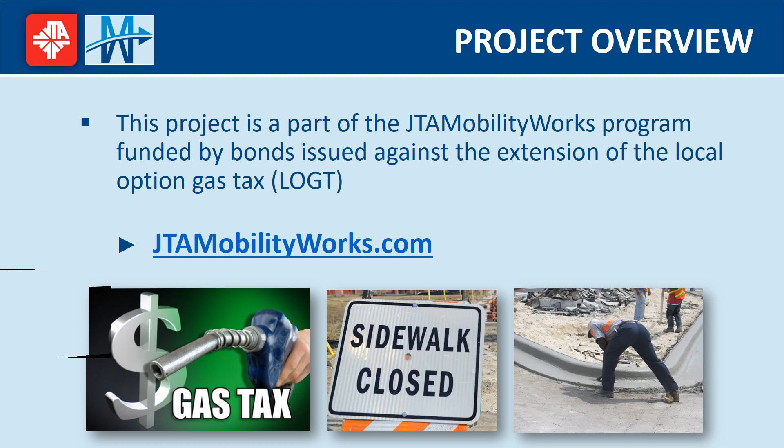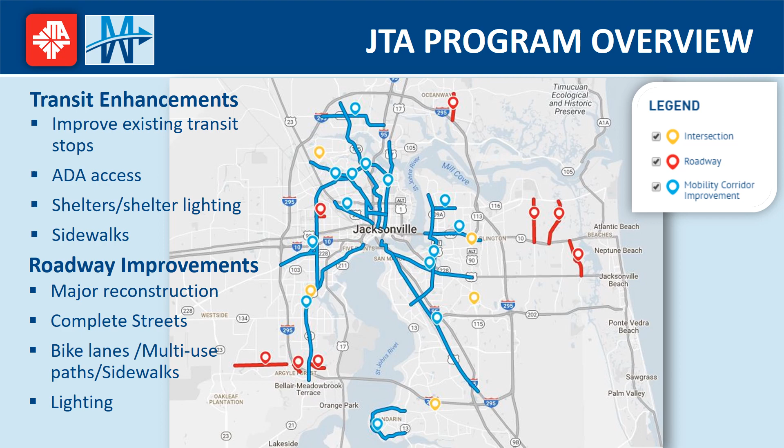As you can see by this map, through its MobilityWorks program, JTA has roadway, mobility corridor improvements, and complete streets projects in nearly every sector of Jacksonville.

Major objectives of the project are to reduce vehicular and pedestrian accidents and delays, provide operational improvements for better vehicular, bicycle, and pedestrian traffic, improve drainage, and provide acceptable traffic service levels through the year 2030. The roadway currently experiences traffic demand that may result in an unacceptable traffic service level within the next 10 years if improvements are not made to the corridor. By providing the proposed improvements, traffic service levels can be preserved and enhanced through 2030 and beyond.

The benefits of these improvements also include improved safety and mobility for all users, reduction in vehicle delays, improved access to the adjacent neighborhoods, bike lanes, and better livability for the residents, while accommodating the significant traffic that uses this roadway.

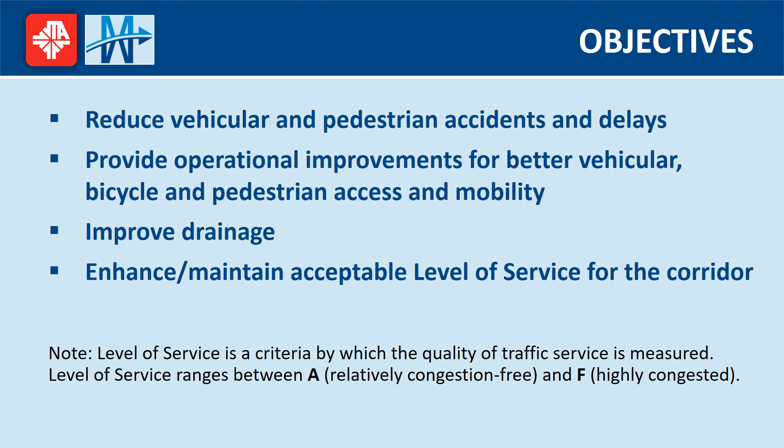San Pablo Road from Beach Boulevard to Atlantic Boulevard is primarily a two-lane road with unpaved shoulders, ditches, and sidewalks on both sides for most of the corridor. No sidewalk exists on the west side of the roadway from just north of Beach Boulevard to Drakes Point Drive, and there are no bike lanes provided.

There are 3 signalized intersections, one at each end of the project at Beach and Atlantic, and one at Osprey Point Drive. The signals at Beach and Atlantic are to receive minor adjustments, while the signal at Osprey Point Drive will be replaced with a mast arm system.

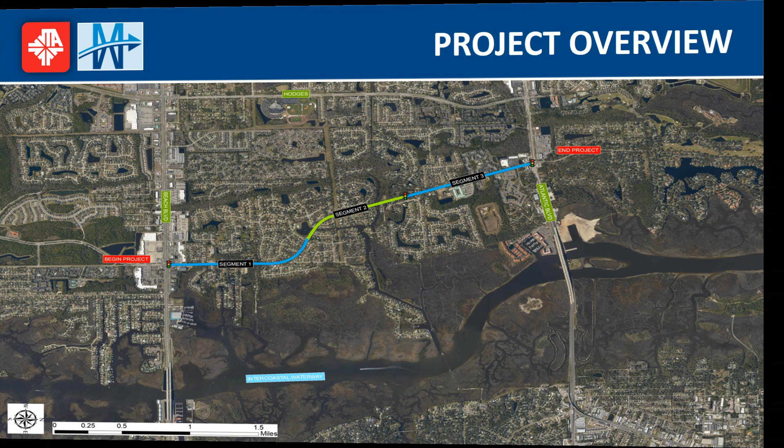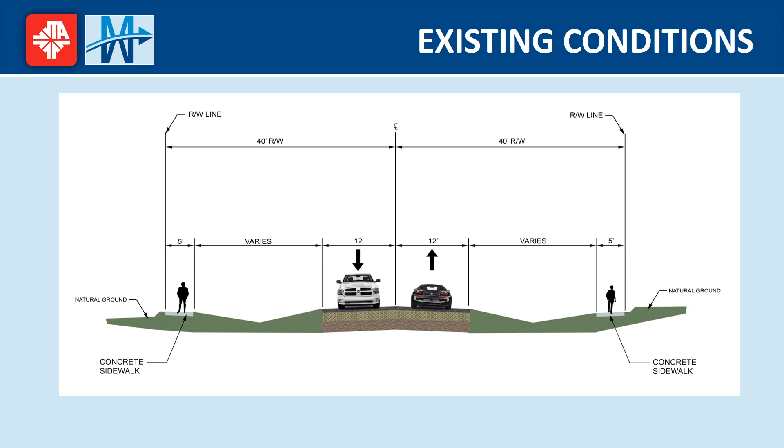This image shows San Pablo Road as the majority of the corridor exists today, from Beach Boulevard to Atlantic Boulevard, with one travel lane in each direction. Swales of varying dimensions are bordered by a 5-foot sidewalk on the outside edge of the travel lanes.

To summarize the existing conditions on San Pablo Road, neighborhood access is limited. The majority of the corridor is a 2-lane road with no sidewalk on the west side of the roadway. The traffic signals are functional with both current and future traffic projections. However, if left unchanged, travel speeds are expected to deteriorate, causing longer delays and reducing travel to unacceptable levels, a service level F, by the year 2030.

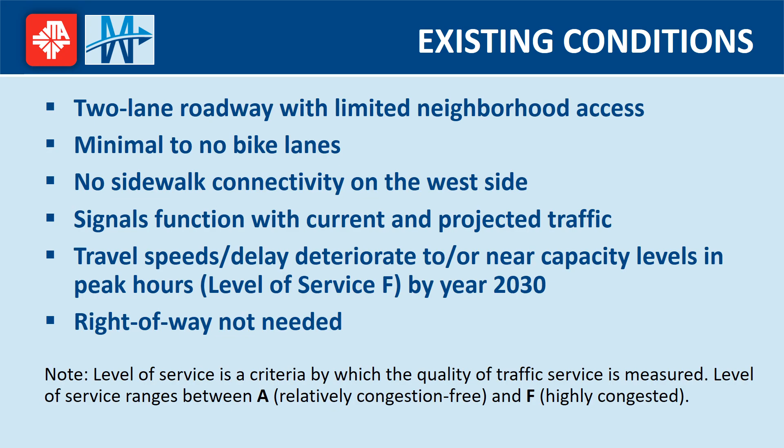This image shows San Pablo Road in the proposed sections from Beach Boulevard to Crystal Cove Drive and from Osprey Point Drive to Atlantic Boulevard. 2 through lanes and a continuous center turn lane are provided for motorists, with a continuous 6-foot sidewalk for pedestrians and 5-foot bike lanes adjacent to the curb for cyclists, provided on both sides of the roadway.

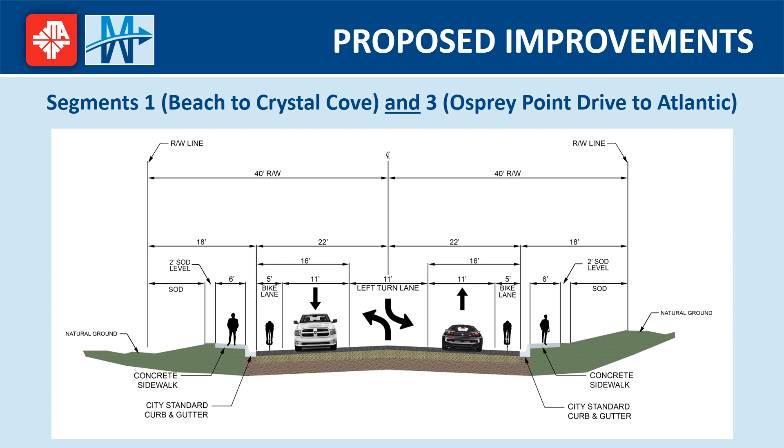The proposed improvements for segments 1 and 3 of the project will be accomplished by reconstructing the existing roadway to a 3-lane section with continuous sidewalks and designated bike lanes. The center lane will serve as a continuous turn lane, providing access to adjacent properties.

Acquisition of some right-of-way is required in order to construct ponds intended to improve drainage along the entire roadway from Beach Boulevard to Atlantic Boulevard. Temporary construction easements may also be required in this area to harmonize the planned construction with adjacent properties. The resulting roadway is expected to function more efficiently with current and projected traffic through the year 2030, due to the increased opportunity for vehicles to make turns without stopping through traffic.

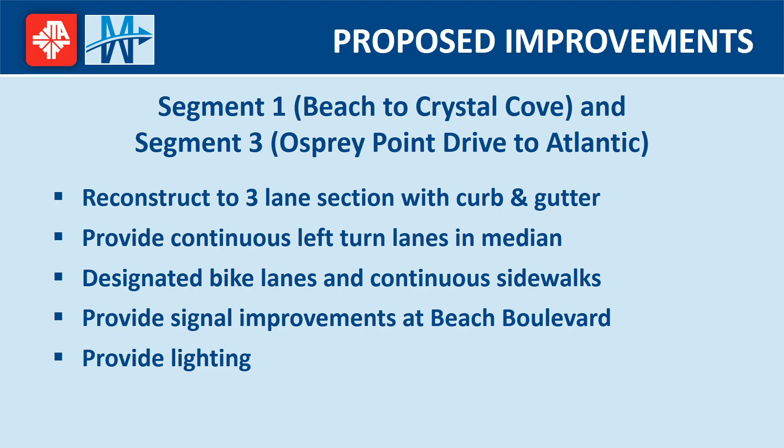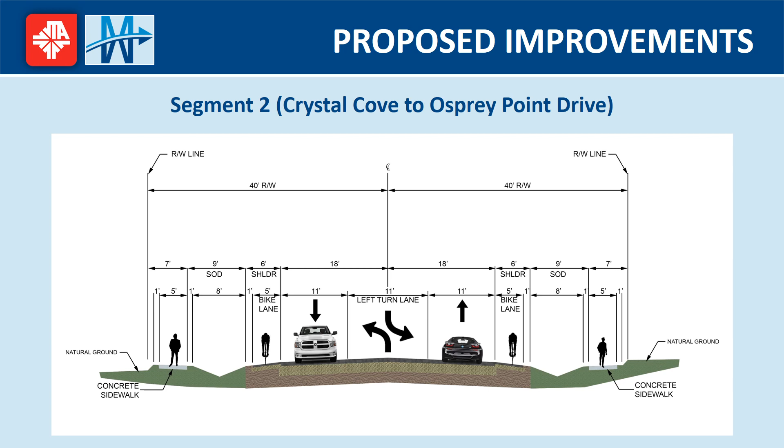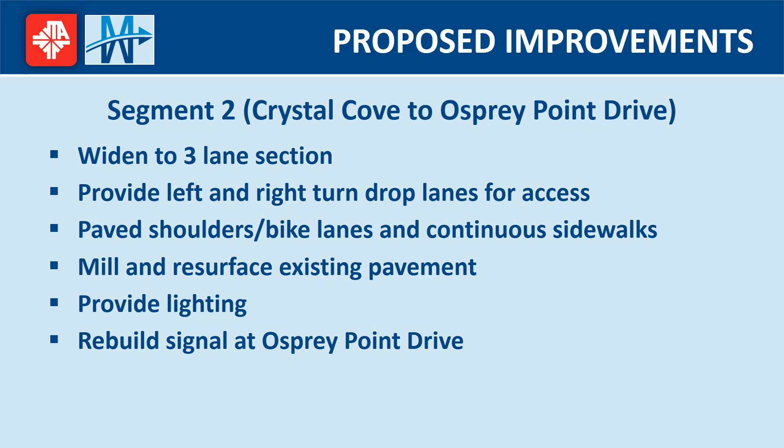The proposed improvement for Segment 2 would be accomplished by widening to a 3-lane section, providing a continuous left turn lane and right turn lanes as warranted to provide access to adjacent developments. Right-of-way acquisition and temporary construction easements would not be expected in this area.

Expected benefits of the proposed improvements include improved safety by reducing crash conflict points and maximizing the efficiency of traffic flow, improved aesthetics with grassed and raised medians in selected areas, upgraded bike and pedestrian travel by providing sidewalk and bike lane connectivity, and pedestrian crossing features will be improved at signalized intersections.

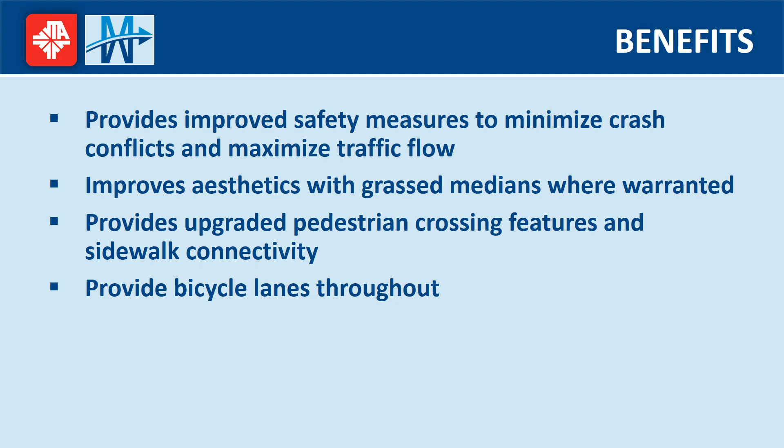Drainage will be improved throughout the corridor with the construction of new drainage ponds. Water runoff will be collected in the current system and transported to outlying water collection areas. The roadway will function more efficiently with current and projected year 2030 traffic due to the increased opportunity for vehicles to make turns without stopping the through traffic. Delays will be reduced for current and projected traffic conditions.

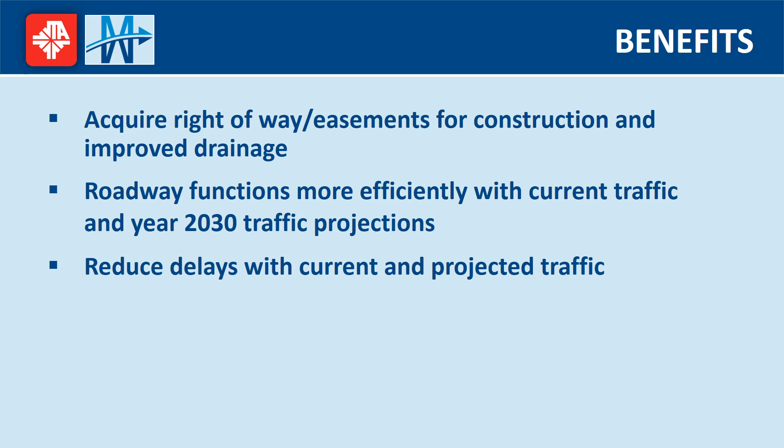Production of the roadway plans began in early 2018, with completion of the final roadway plans expected by the spring of 2020. Construction will begin in the summer of 2020, with completion expected by the spring of 2022.